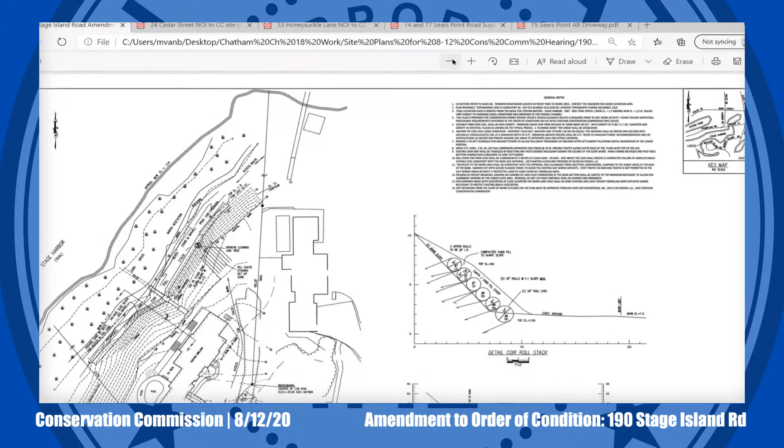I will read the public notice. Amendment to Order of Conditions, 190 Stage Island Road, Deborah A. Phillips, 2013 revocable trust owner, Deborah A. and Daniel D. Phillips Junior, trustees. The DEP number on this is SE10-3399, Phase 2. Request to amend existing order of conditions under SE10-3399 to include an addition of 40 linear feet of a coir roll erosion control project at 190 Stage Island Road, Assessors Map 13A-1, Parcel D150.

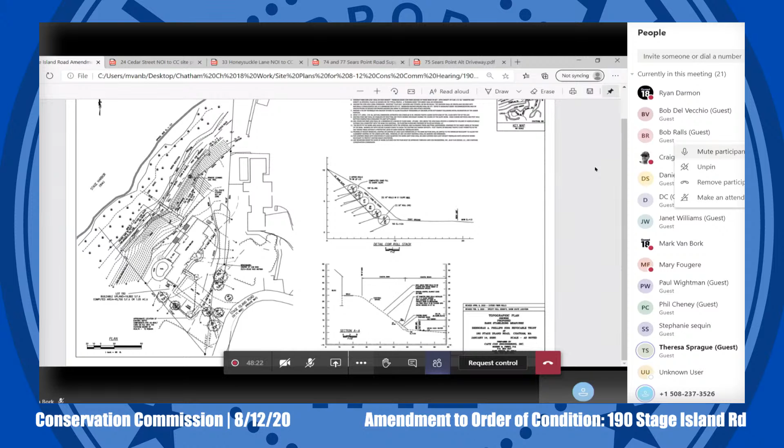I'll make it brief. We reviewed this with you back in the spring as the first step for the amendment process. I think the installation of the fiber roll, which was the primary project, went very well. Toward the end of that installation, there was an observed need to extend those fiber rolls, and a 40-foot extension was proposed on the north end of the array that was installed. That ran into COVID-19 hearing trouble, and we ran into spring weather, which caused the project to cease, and the amendment just sat there. Here we are today talking about it.

It's very basic, just a 40-foot extension of the project that was already installed. There's a few things about it that are different, where we're going to taper the cross-section, but the work would be carried out very much the same, except that it's far smaller in scale than the original project. The vegetation management would be identical to the management that's ongoing today. I don't believe there's much vegetation that would be installed there because the upper bank hasn't fully collapsed. That's all I can say - we're planning on getting something done as soon as the weather permits, and it would be a far smaller effort than what you've seen in the past.

So with that, I'd be happy to take your questions. Thank you, Bob. Oh, Janet, just Theresa Sprague is also here. Good morning, Teresa. Morning. I'm happy to answer any questions about the original installation of the fiber roll array, the plantings, etc.

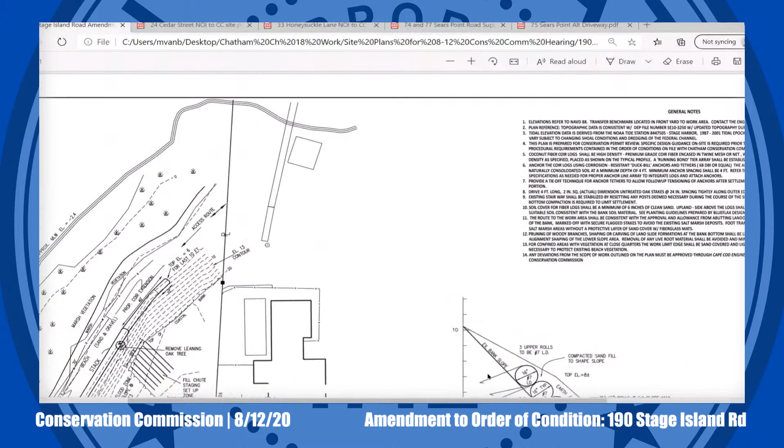Yeah, I know. Hi, Teresa. The extent of any removal is whatever slides or collapsed roots are in the way of the installation, but very minimal from my understanding.

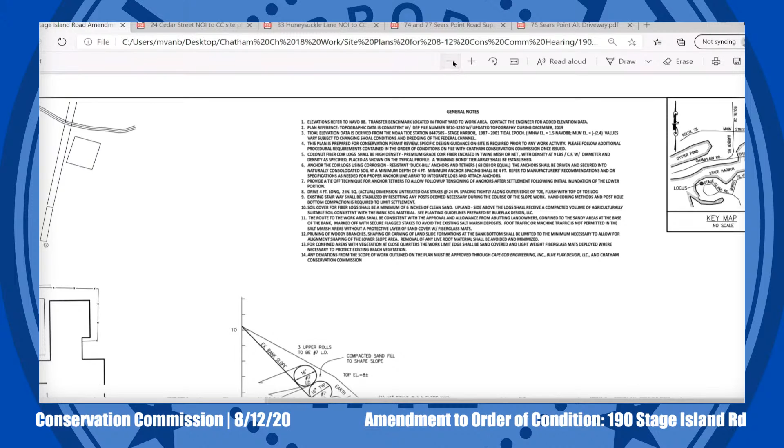Teresa? Yes, that's correct. You can see the area where we proposed to extend the array down into - I'm pulling up photos that I'm seeing right now, sorry you're not able to see them - from when we finished the project last spring. There's just a small extension of an area. There was no vegetation in that area. There had been some scour, and given the extent of the project, we just wanted to make sure we covered that additional scour area so we're not causing more scour in the future. So there was some scour there previously, not as severe as what we had seen. As Bob pointed out, there was no slumping in that area. We just want to be proactive.

Okay, one more question. The amendment talks about next season - by next season, what do we mean by next season?

When we originally made the request to amend, it was just as we were finishing up the project, and at the time everything was shut down due to the COVID-19 pandemic. So next season was this fall, which I'm presuming is the same time period. So we had filed, I believe, in April. Was this request to amend filed last April? Yes. Okay, so we meant the next work season, after the summer season's over, so late fall. Okay, that's fine.

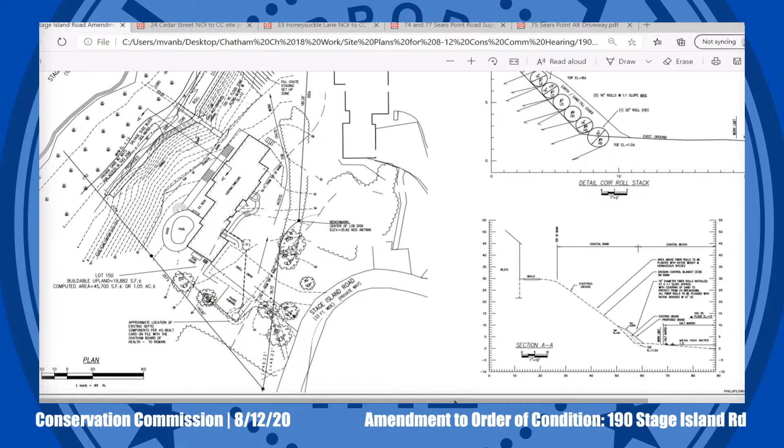I have another question for Teresa. Any other questions, Tom? No, that's it. Okay, thank you. All right, Bob, go ahead.

Teresa, you're going to be planting new vegetation above the extension. Do you have any concerns about planting in a drought? I am very concerned about this year's drought for this site and many others. I am glad we did plant some additional plants in the spring, and we are now just watering and supporting the plants we had put in previously. One of the things I've been concerned about is because of the drought, we've had little germination. That seed is just sitting there dormant, waiting for some water.

The one thing that has done incredibly well, which does not mind drought conditions, is beach grass, American beach grass. So that's filling in this area and really doing a good job holding the sand over the fiber rolls themselves. We have had multiple discussions with the Phillipses about the need for water when we're in a situation like this. When we do this additional work, we'll wait until late fall to plant. But given the fact that I think we're going to see these kinds of conditions regularly over the next few summers, I think it's going to be really important to get water on this bank to get these plants established.

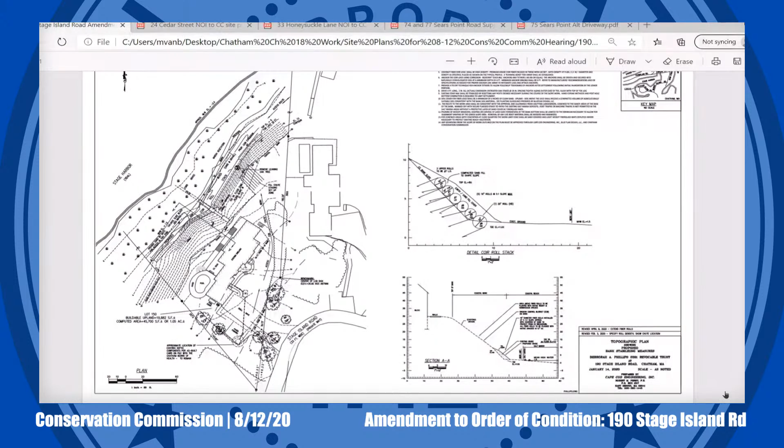Bob Ralls, motion to continue to the work session on September 2nd. Thank you. Is there a second? Clark seconds. You're it today, Tom.

Okay, roll call vote to continue this to September 2nd. Commissioner Ralls, aye. Del Vecchio, aye. Clark, aye. I vote aye as well.

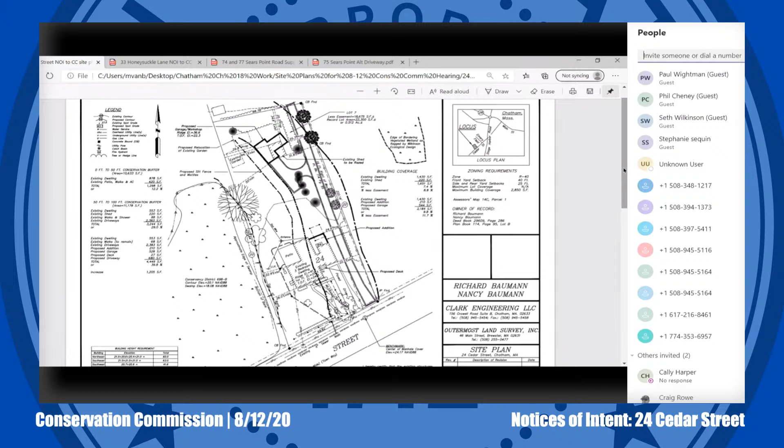Sorry about that. Yes, I've worked up a mitigation plan, which I believe you have in front of you. I don't see it on the screen yet. The screen shows the site plan, but we have received the mitigation plan. There we go, thank you.

Yes, I've worked to get a healthy planting area. Checking my numbers, I've got a total of 1,486 square feet of planting along the edge of the resource area as best we can. We're fairly tight to the house towards the street, but we still managed to get a strip there where it's a fairly high erodible bank, so we got 617 square feet of planting along that area to fill a gap.

In between the two green mitigation areas is a mature spruce tree which is doing fine and prevents any new planting underneath it. To the north there's a broader area of planting, which would also displace an existing vegetable garden, being relocated a bit to the north and east, as far as we can get it outside the disturbed zone but still have light for a functional vegetable garden. I've got replacement trees scheduled: 1 white pine and 3 red swamp maples, to replace the pitch pines being removed for the driveway. I think that covers it in general.

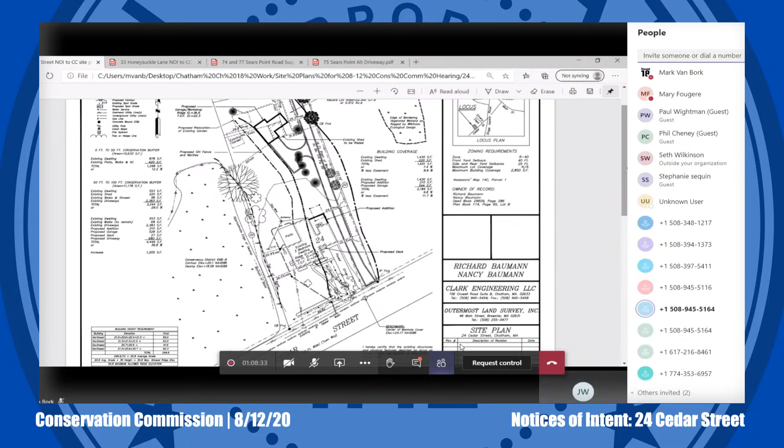The plan is dated April 6th, 2020. I do see what I think are some minor discrepancies in coverage calculations on the site plan versus the planting plan - the planting plan shows plus 16 square feet in the NDZ, whereas the site plan doesn't. I think it'd be good to get those two in sync. It's probably not wildly significant, whichever way it falls. Well, it's a little significant, I'd say Bob, because even a minor incursion into the NDZ would need to be looked at. They're also not the same as the coverage table in the narrative.

Yeah, right, that's my fault. David Clark here - that's my fault. We initially proposed the garage so that 16 square feet of it was over the NDZ line, and we sent that to Phil. We forgot to send Phil the revised plan because we didn't want to ask the commission for any additional coverage in the NDZ. So I will get Phil the proper plan and we'll make that correction. Thank you.

On the planting plan, it indicates there's a demarcation for the northern area of mitigation, but I don't see that for the southern mitigation area. It'd be good to make that more clear on the map - there should be a demarcation for both of them.

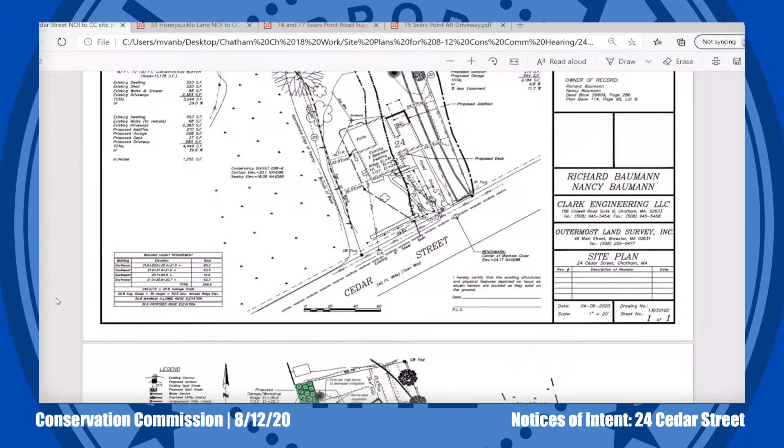Go ahead, Tom. Okay, I'm looking at the site plan, and the one that's labeled proposed addition, is that the garage that you're talking about? And is the garage in existence there? And then you're going to be putting like what used to be sometimes referred to as granny quarters on top of it?

No. I'm trying to understand what that proposed addition is comprised of. So you see the existing paved driveway, that's the entrance into the garage, so that addition is the single car garage. That garage space is going to be converted to living space and an addition proposed on the north side of it. So it'll be a frost wall, 4-foot excavation, and then living space built on top of that.

Are you building a new garage for the property? Yes, that's the detached garage on the north side, at the upper end of the property.

Okay, I have to admit that with my poor eyesight, I'm not really focusing on the garage. Is that the, looks like a square on top of a rectangle at the upper end? Yep. So the heavy line is the footprint of the new garage workshop, and the lighter hatched line underneath is the shed that's going to be removed.

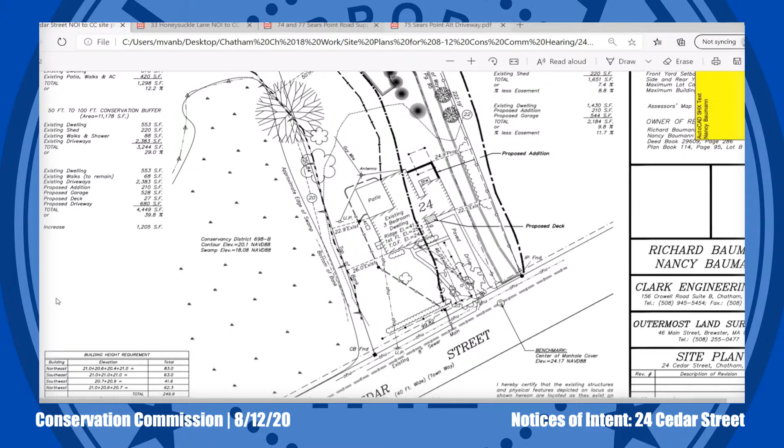Okay, thank you. I had some concerns about a couple of things. You touched upon it, which is, I think you're saying, or you recognize that the table submitted on page 7 of 8 of the materials, that note there that you're going to add 878 square feet of structure within the no disturb zone, that was an oops?

I don't see what you're referring to. Hold on a second, I'm looking. It's the letter from you to the Conservation Commission dated April 28th, 2020. On page 7, there's a table of the number of square feet being added and subtracted. At the very top of it, you'll notice within the 50-foot no disturb zone, for the section labeled area of structures under proposed square feet, is the number 878.

Oh, that is a mistake. Let's see. That 878 should be over to the left and under existing. Actually, it should be added to the left under existing. So what's being proposed is still 878. So the net change is 0.

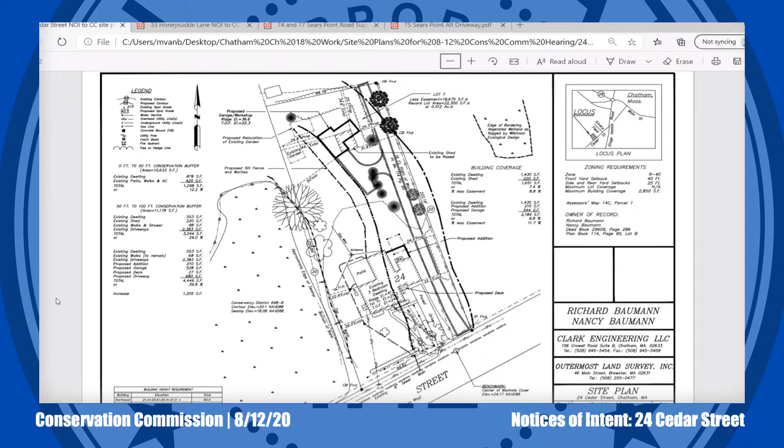And I show the work limit 10 feet off the building face. I will speak to the general contractor to see if we can tighten that up, because it's not going to be a full foundation, obviously, just 4 feet of foundation for frost protection. We might be able to tighten that up. And all the access will be off of the existing right of way. Yes.

Tom, other questions or comments? No, that's it. All right, thank you. Anybody else? Other commissioners, questions or comments? I have a question. Yes, Bob, go ahead. For Phil.

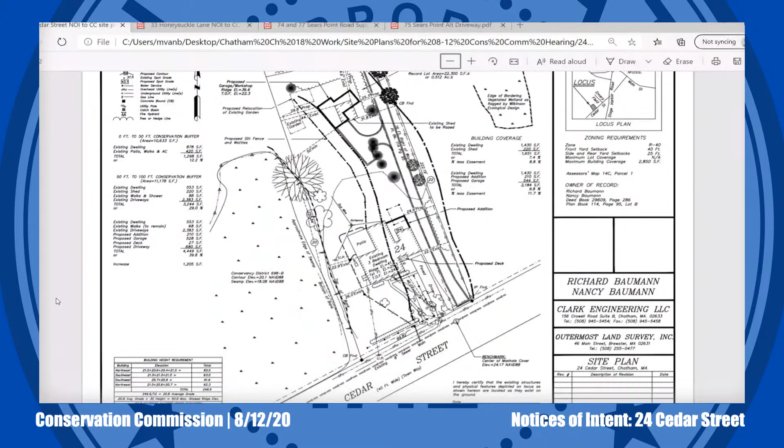Yes, the mitigation area to the north on the other side of the spruce, there's a lot of bittersweet wanting to grow out of the ground. Wondering what you're going to do about that before you plant. Okay, and I apologize, I haven't looked at that spot in about 6 months now. It was winter. I don't think there's too much in that exact area where that's going, perhaps a little bit on the very northerly end. But certainly doing a cut and swab on any bittersweet we find in that area, if there's any other invasives, would be a prerequisite for getting these plantings in.

Okay, and so we can add that to the OOC going forward. Yes.

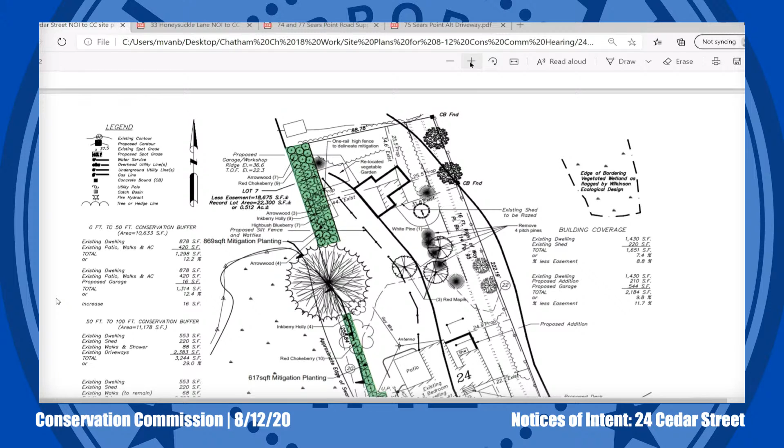Another thing was the mitigation area to the south of the spruce. There are some existing arborvitaes and some other plants, the mimosa tree and so forth. Those are going to remain? I believe all of that is going to remain. I think there's one just south of the spruce, I think is a Rose of Sharon, an exotic ornamental, which may need to go to get that in there. But it's, if I remember, a tired ornamental without much value.

Okay, and then you have a red maple being substituted for the ornamental plant on the south of the front yard. Yeah, I apologize, apparently the plan on the screen is a slightly different version than you might have received in paper form, because I think that was the final revision. Yes, it's an exotic shrub in the front there, and the owners thought that putting one of the trees there as a replacement would be a good idea.

Do you think it may be too close to the house if you plant a red maple there? Oh, not at all, no, plenty of room for that. We've got good space there. Okay. I think that's all I had. Okay, thank you, very good. All right, thank you, Bob.

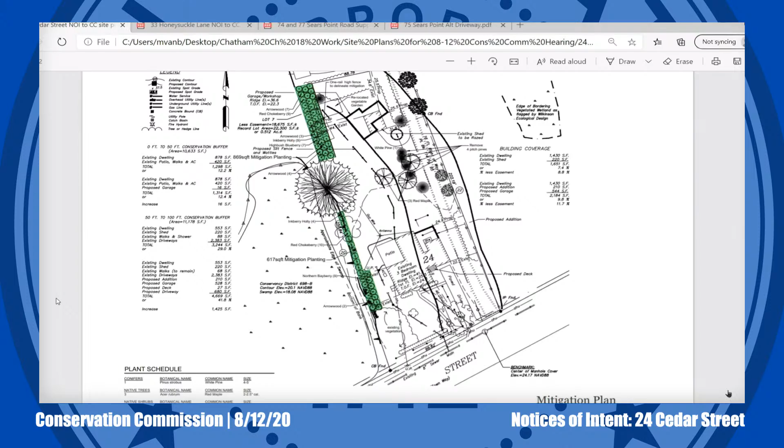Any other questions or comments from anybody on the call? Okay then, David, and Phil, are you available next Wednesday if we continue this to get these pieces put together and complete it? Yes, I am, Steve, Phil Cheney. I can get you the revisions on the plan and the variance by the end of the week. It won't be your typical one-week request to have it before the meeting, but if the commission is fine with that, I can. We're fine with that, since we're the ones who scheduled the hearing within a week of the scheduling.

So just to review, you're going to correct and conform all the figures on the site plan and the mitigation plan, identify the 50 and 100 boundary lines, add a work limit line as close to the NDZ line as possible, add a request for a variance, and ensure that the mitigation plan the commission has is the most recent and correct version. That's what I've got.

Yes, Phil Cheney here. Once I have the revised site plan from David, I can revise my plan, resubmit the PDF on that, and I assume you'd want a couple of hard copies as well? Yes, please. Mary, how many hard copies are we collecting these days? We just need 2 for the file because everybody else will receive it electronically. Is that okay with all commissioners to receive a digital copy only, or does anybody want a hard copy?

I'd like a hard copy, please. Okay, then make 4 in case somebody else wants one. Very good, I'll provide 4 hard copies.

Thank you. And Janet, just that the Rose of Sharon has to be identified to be removed too on the mitigation plan. Okay. Did you get that? I'll take a look and confirm that. Okay, thank you.

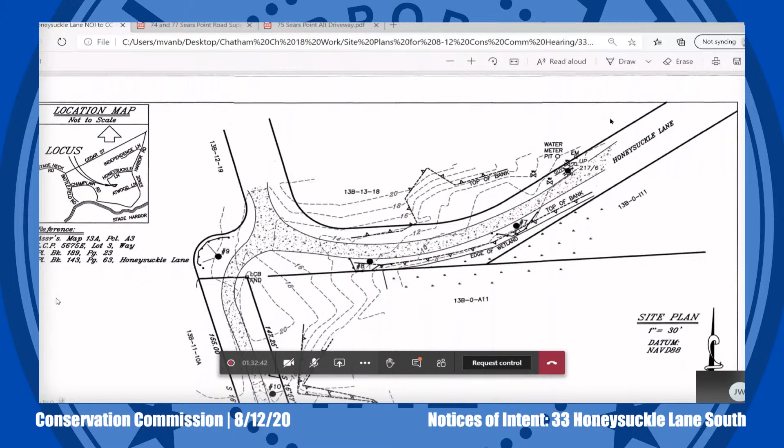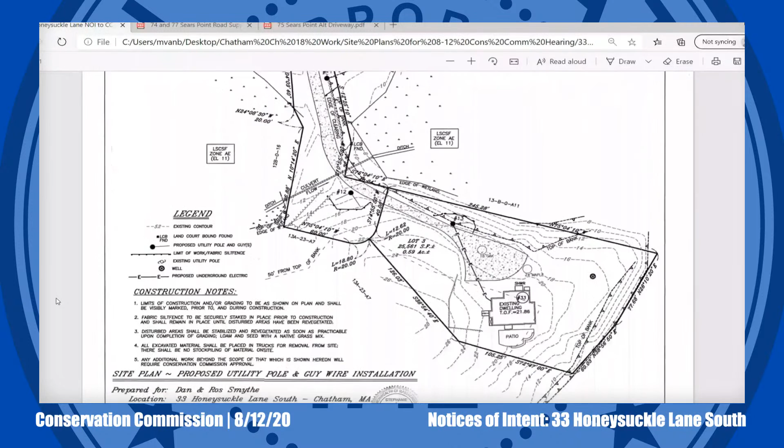Good morning, Stephanie Sequin with Ryder and Wilcox. I'm representing Dan and Ros Smythe. Mr. Smythe, Dan, is here attending as well. The project is the installation of 7 utility poles and overhead electric service to provide electric service to the existing house at 33 Honeysuckle Lane South, which is at the very end of Honeysuckle Lane South. The house was built in the 50s.

Currently, the electric service comes from Champlain Road overhead across private property to a pole that is also on private property, and from that pole goes underground to the back of the house. It recently came to the attention of the Smythes—actually it was more like 5 or 10 years ago—that the current service was installed without a legal easement for any of the poles or wires that exist. The Smythes have been in lengthy discussion with the private property owners and have repeatedly been informed there is no legal easement. The current owners are not willing to grant an easement, so they've had to investigate an alternate source of providing electric service.

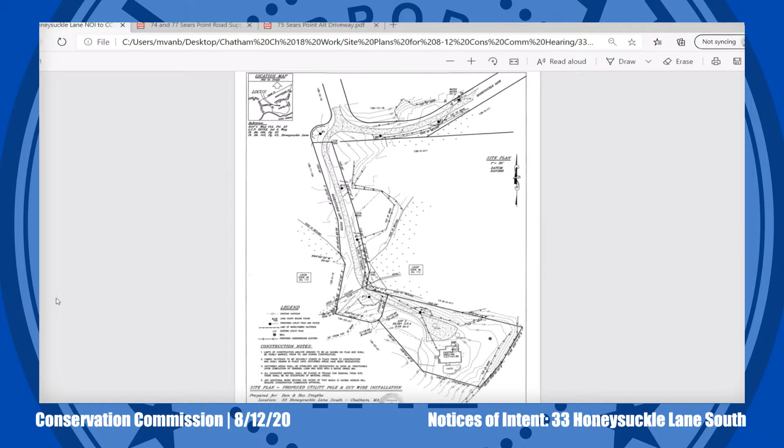The poles will be installed using a vehicle mounted auger. I'll be honest, I've never seen a utility pole being installed, so I can't say exactly how that works, but as the auger advances, soil will be pulled up. I've specified that excavated soil be immediately removed, placed into a truck for removal, and not stockpiled anywhere on site.

Once the pole and guy wires are installed, the disturbed areas will be stabilized and restored, loamed and seeded with a native grass mix.

I guess the only other thing, the final pole will be on the Smythe's property next to their driveway, and from there the electric service will go underground across the driveway and into the building. Otherwise, all the electric service will be installed overhead on the poles. This solution was arrived at by Eversource and the Smythes as the least intrusive way of getting the service from Stage Harbor Road to the property.

So I think that's it. I'd be happy to answer any questions. And again, Dan Smythe is available as well and could provide any additional information as far as how they got to this point, because they were involved in the discussions for quite a while before I became involved.

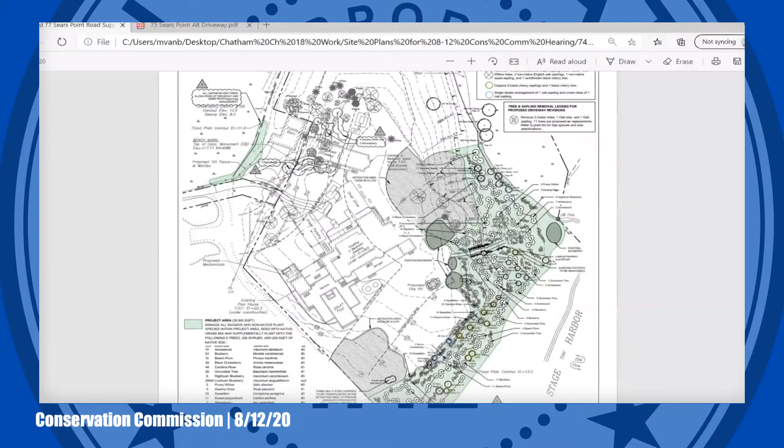All right, thank you, Paul. You're welcome. We got what I believe is the revised restoration plan showing. David and Seth, are you here? Yes, we are present. Okay, good morning. Good morning.

Thank you. We've received the revised land management plan and restoration plan. Thank you both as well for the on-site tour and review of the proposed mitigation area and the proposed driveway area. I will say, Seth, that the tree inventory you supplied has set a new standard in terms of completeness, thoroughness, and usefulness of the information and how it was presented. We're going to require this going forward. Everybody will hate you for that, but oh well.

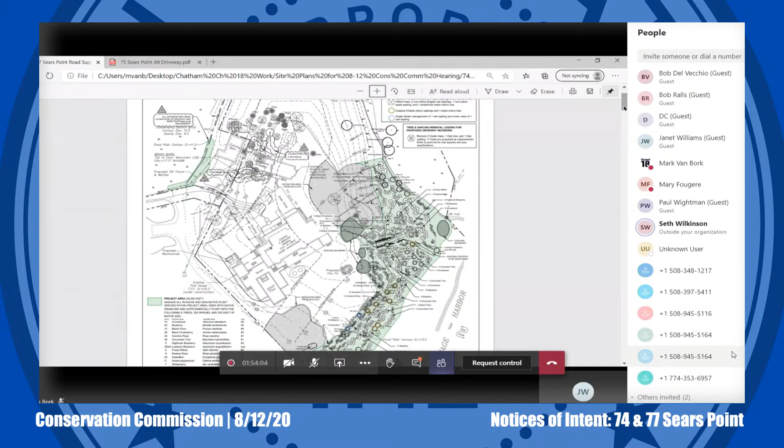So why don't you walk us through what you submitted and bring us up to date? Thank all of you who were able to attend on that hot day in the field, we had great attendance that day and we appreciate that. I'll mostly summarize and go into more detail around activities at the proposed driveway and guest house, since that was less developed in the field, but there haven't been any considerable changes since we reviewed the data for the extensive restoration here.

It continues to be just shy of 30,000 square feet of additional vegetation that would link to the already previously proposed mitigation area, which is well underway. That was approved under a separate order.

To run quickly through what's proposed on the embankment: in addition to complete removal of invasive species, the restoration planting includes over 250 shrubs, 200 square feet of low bush blueberry, 910 grasses planted as plugs, 382 forbs planted as plugs, as well as seed mix and 6 trees, which would be pussy willow to replace the exotic willows down in that wetland area.

The quick list of what we're proposing to manage in terms of trees: there would be 1 small tree and 8 saplings of black cherry, which we propose to coppice. We think they'll have a much longer and healthier life on this windy coastal bank if turned into multi-stemmed trees. There are examples of those thriving at this site already, and they'll be less prone to wind throw in particular. We've also had success with this technique just down the road at a nearly 10-year-old project on Battlefield.

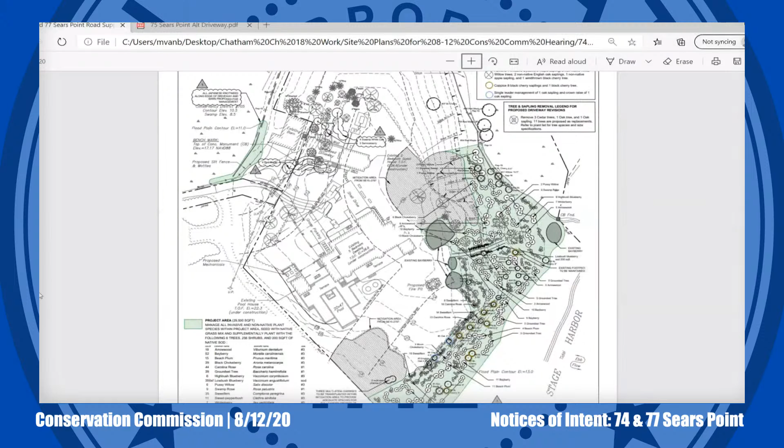Mark, if you can zoom in a little bit on where it says proposed driveway. We don't need the mitigation area anymore. Keep going, you can do it one more and maybe one more.

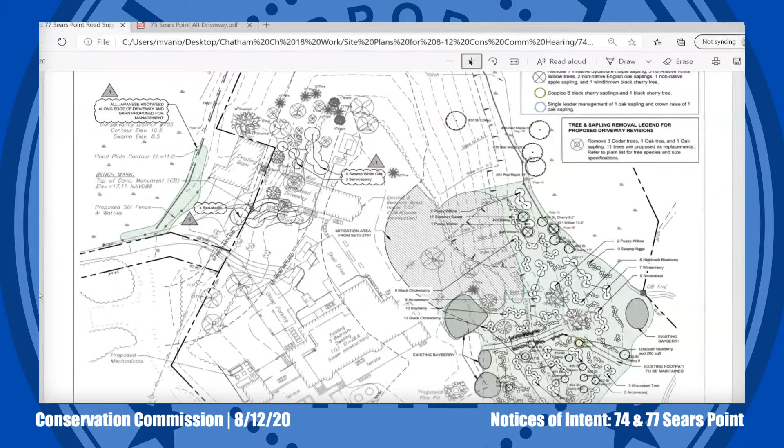So just to confirm again, the retaining wall is marked on the north side of the proposed driveway. Is there also going to be a retaining wall on the other side? A very short one, less than half the length of the other one, just to facilitate getting a set of stairs from the upper level down to the lower level. The rest of it will be regraded.

Oh, okay, I see. I see the stairs there. Okay.

All right, other questions? David, were there no changes since on this part of the plan? Do you have anything further, or should I just open it to questions? No, I don't have anything further. Okay, questions and comments from commissioners?

Clark? Yes, Tom, go ahead. For David, between all the various plans, when I was adding them up last night and looking at them, I came up with 4 different configurations for the driveway. And then confusion reigned, of course, because we got a drawing last night with 2 options noted on it.

In all honesty, I have no idea what driveway configuration you're going with, because of all the plans that have been tossed our way. Have you settled on one? Yes, we have. It's the only official site plan submitted for the filing, from Clark Engineering.

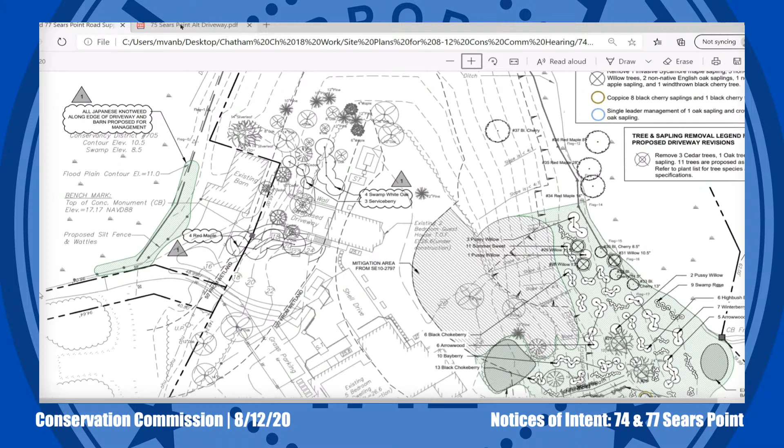So that's the plan sent last night, showing two alternatives. Alternative 2 was the one that shows access to the lower level. Hold on, David, I'm going to interrupt you. Mark, can you click to the next tab there? That's the one he's talking about. Okay, thank you, go ahead David.

So alternative 2 is not a proposed driveway. It's not what we're considering, but it is an alternative showing how we could provide access to the lower area and stay out of the no-disturb zone. I think in the narrative I said it was 300 or 400 extra square feet of site coverage within the 50 to 100 in order to achieve that. And it's not a proposal that we want to pursue.

Okay, I had one other question. When we were out enjoying the benefits of your excellent excursion around the property showing things to us, I noticed as we got back to the barn area there was discussion about, I call it a hillock, that would have to be graded. I didn't see anything in any of the plans or diagrams that gave us any idea about what that grading would look like, how much soil would be disturbed. And since that is occurring at least in part in the no-disturb zone, I think that's an important bit of information we would need to evaluate the site proposal.

So the official Commissioner site plan does show proposed grades on both sides of the driveway going into the garage. The solid lines with the 16, 18, 20, and 22 boxes are proposed grades. Underneath that are dashed lines showing the existing grades. So we're showing how that slope is being cut back on the south side of the driveway, and we're minimizing the regrading on the north side by the addition of the retaining wall.

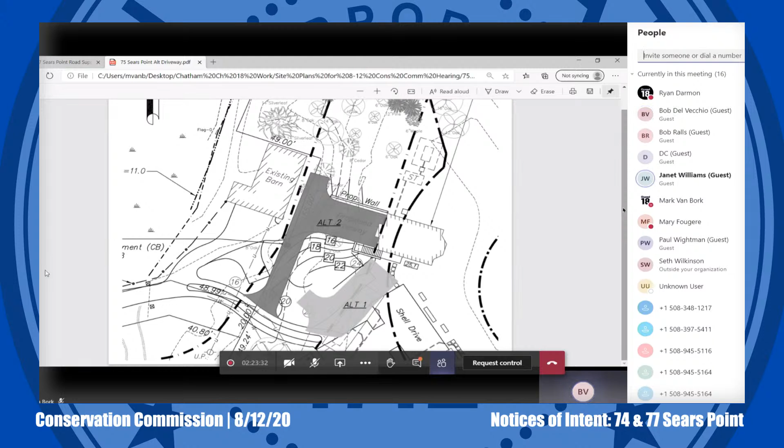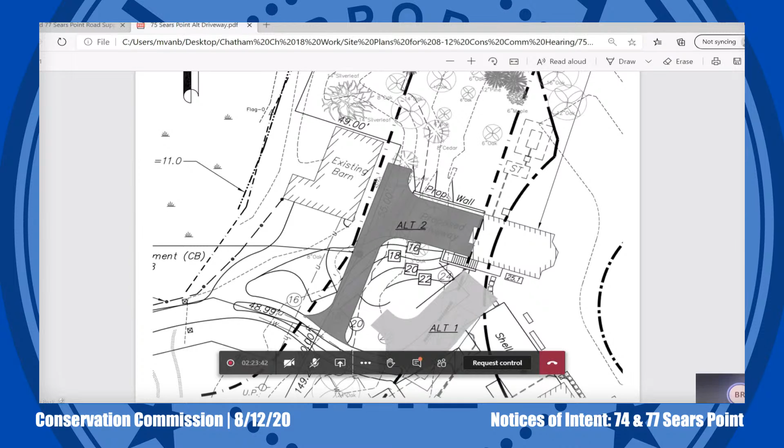Thanks. Okay. One more follow-up, yes Janet, go ahead. Comparing the preferred proposal versus alternative 2, do we have an understanding of the number of trees that would be removed for alternative 2? For alternative 2 it would be the same number of trees, because the trees requested to be removed are all within the maneuvering area to get into the garage. Same number, okay.

My preference is to take this to deliberation next week, and put it to a vote after we've all thought about it a bit more, and what the order of conditions, which direction it will go, and then schedule it for the work session on September the 2nd. Unless David and Seth, you prefer for me to take a straw poll right now and see where the commission is coming out.

Just think about that for a second. I guess we could take a straw poll, and then if the commission isn't in favor of this, we'll have to put it back on the applicant to see if they want to withdraw the project.

All right, so the question I'm going to put, that would be the entire project. Sorry, say that again. So if the client chooses to withdraw, we would be withdrawing the entire project. Oh, I understand that. So if the commission voted a preference to pursue alternative 2 for the driveway configuration, you're saying you would have to go back to the client with that as what the commission would be prepared to, and at that point they make the decision whether to accept that or withdraw. Do I have that right?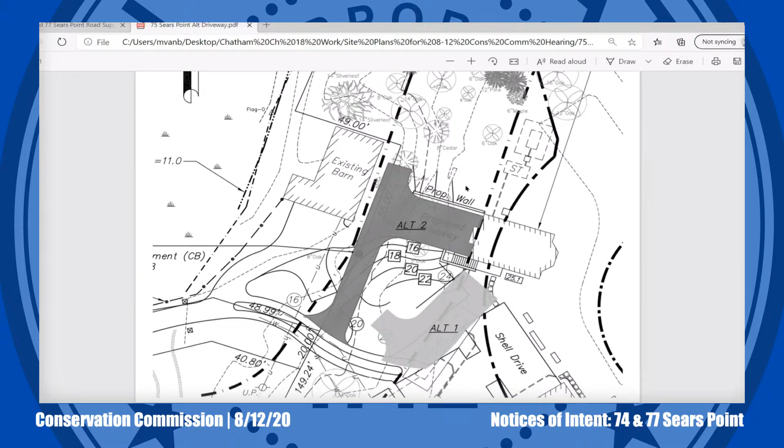So with that, I would ask for a motion to continue this to next week, when we will be making a final decision about which way to proceed. Do I have a motion? Bob Rawls, I move that we continue to August 19th for further deliberation on the proposal. Is there a second? Clark seconds.

All right, roll call vote to continue to August 19th. Commissioner Rawls, aye. Vecchio, aye. Clark, aye. I vote aye as well. It's continued to next week for deliberation and decision. Thank you all very much. All right, thank you, guys. Thank you.

Okay, Paul, next one. Thank you, Madam Chair. 305 Main Street, Timothy C. Emerson Revocable Trust, care of Peter Emerson, Susan Gordon, trustee, SE 103393, proposed demolition of cottage, construction of new cottage, construction of a building addition to a single-family home at 305 Main Street, assessors map 16, parcel 33.

All right, thank you. So the applicant has requested a continuance to October 14th. So do we have a motion?

Sorry, yes, Bob Rawls. You're speaking into the nether world. Searching for the unmute button. Motion to move to, what was it, October 14th?